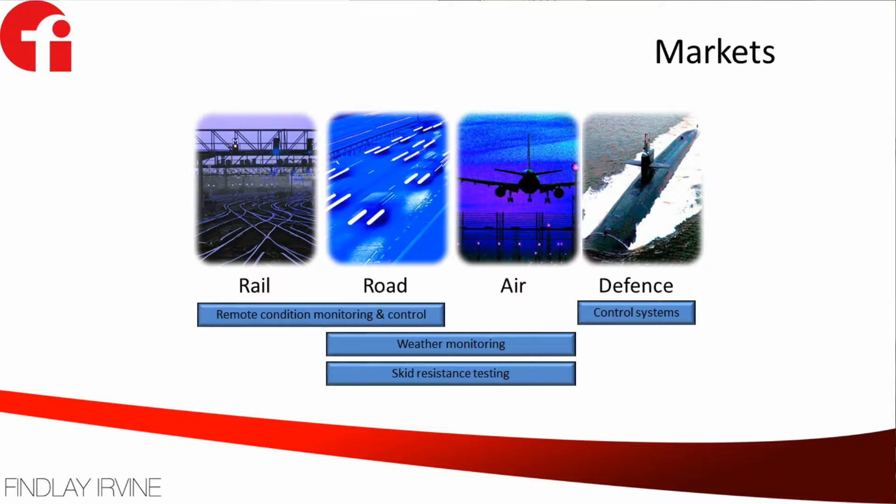Our main areas of markets are defence, air, road and rail. Some of them overlap, so weather monitoring applies to both road and air. Skid resistance testing applies to both road and air. And the bulk of our business nowadays is on the railway, which is Network Rail in the UK. The trains are actually owned by separate companies, but Network Rail are responsible for maintaining and running the track, the signalling and the stations.

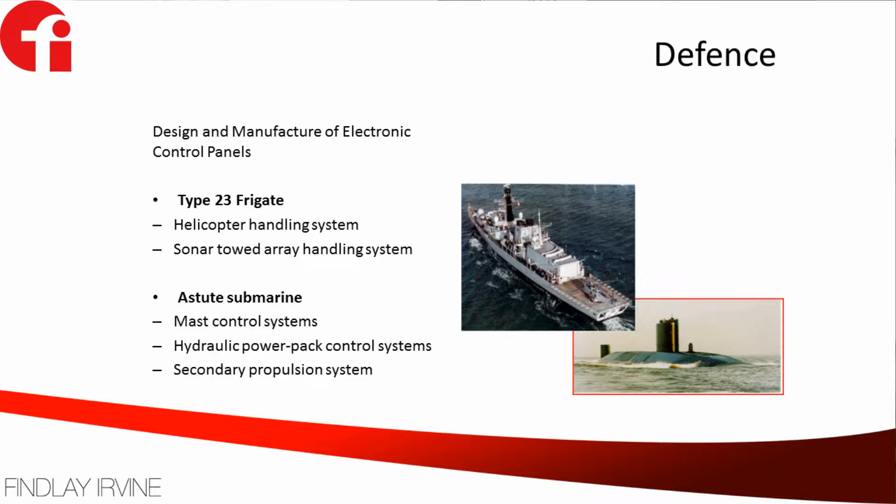So the defence market we have is very limited. We supply a few control systems for the Astute-class submarines and a few things for the Type 23 frigates, including a helicopter handling system. The best way of describing that is playing radio-controlled cars with a couple of £1 million helicopter. It's quite fun.

We do a number of things called grip testers. These work on spinning a wheel at a different ratio to the drive wheel, so it forces it to try and skid. You put a known amount of water in between the tyre and the surface, and from that you can measure the friction of the road surface.

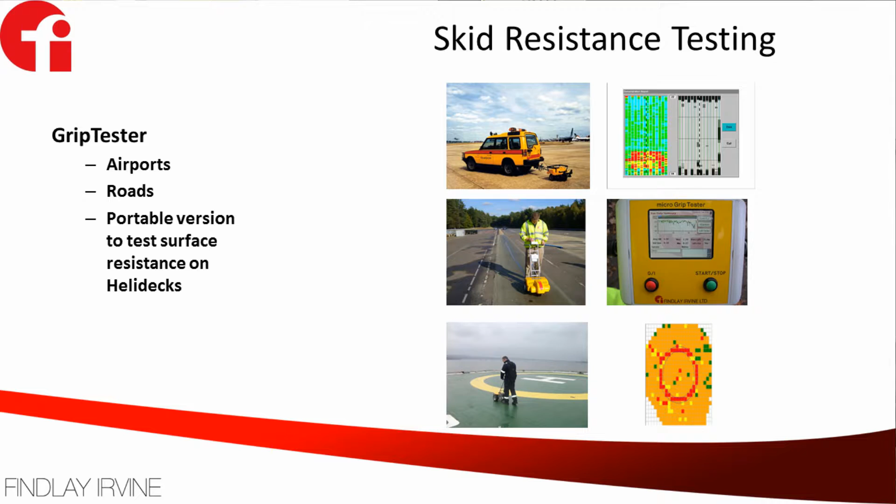All runways are required to be tested in relation to the number of flights they handle, so Heathrow has to sample it every couple of days, whereas somewhere like Jersey may only sample it once every 6 months. We also do a portable version to take out to helidecks on oil rigs, shown in the bottom picture. The results of that come up as a little graph showing whether the friction is good or bad.

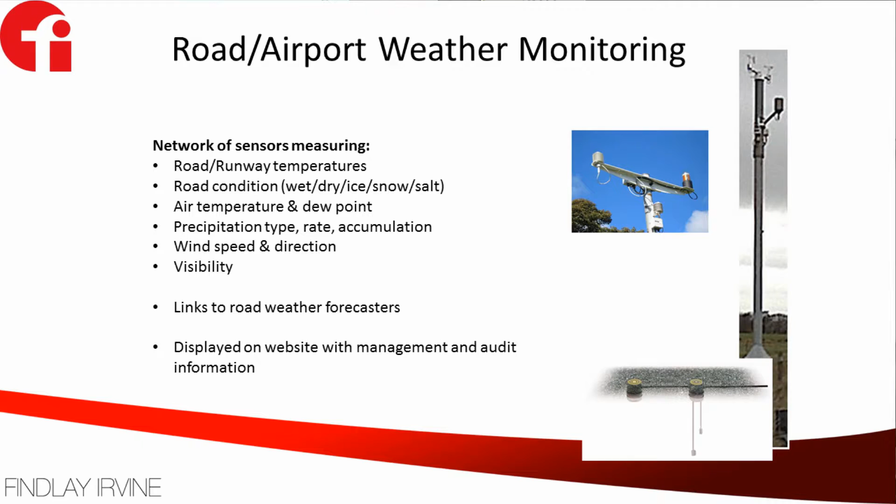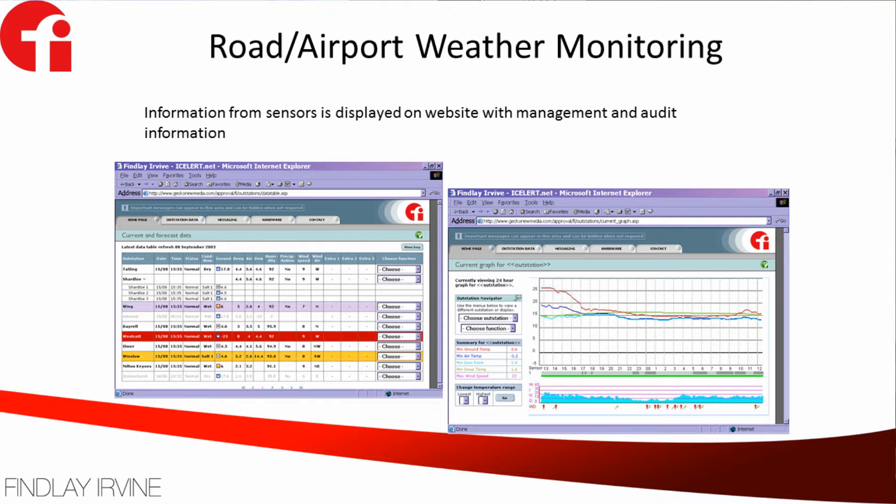A lot of the weather stations you see dotted along the motorways in the UK are provided by one of two companies - one of them is us. So we do air temperature, humidity, rainfall. We have road sensors which can work out the amount of chemical on the road surface. That's used by local councils and highways authorities to work out whether they need to send out gritters and clear the ice. That's provided in the form of a website called IceAlert, which all the local authorities and highways agencies have a login to. We also get information from the meteorological office which feeds into the calculations displayed on the graphs.

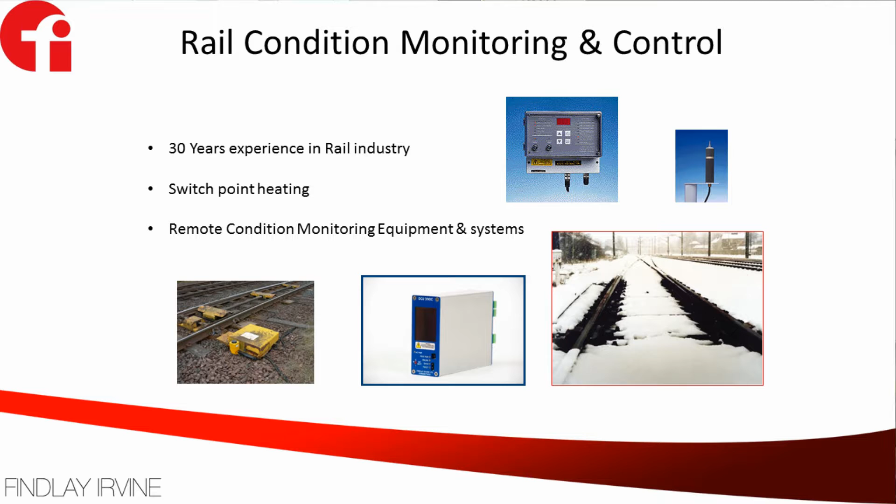The bulk of our stuff, as I said, was railway stuff. One of the things we've been doing for about 30 years is points heating and controlling. So we provide heaters which are mounted underneath the track to heat the points to stop them freezing together. The little unit in the middle is a monitoring unit which detects the temperature coming back from one of the various sensors, so it knows the temperature of the rail and the temperature of the surrounding area.

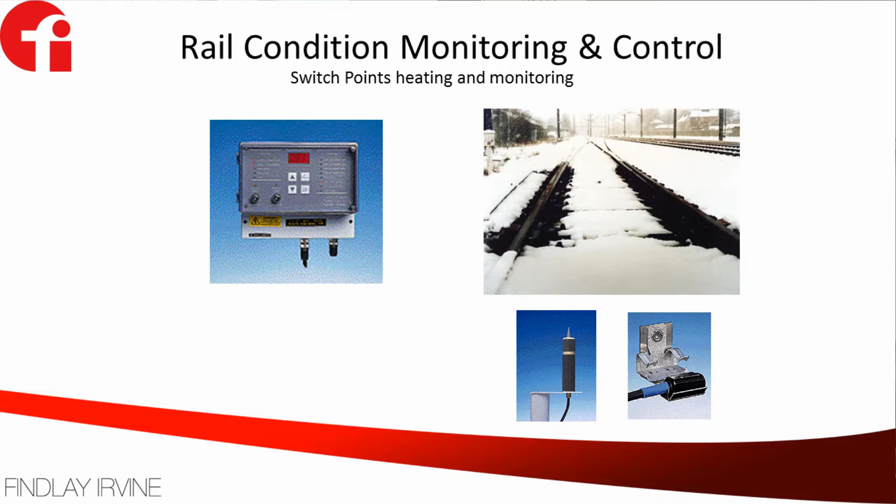Another thing we do is monitoring of the current going into point motor controllers, so they can detect whether they're seized. Those are done using current transducers.

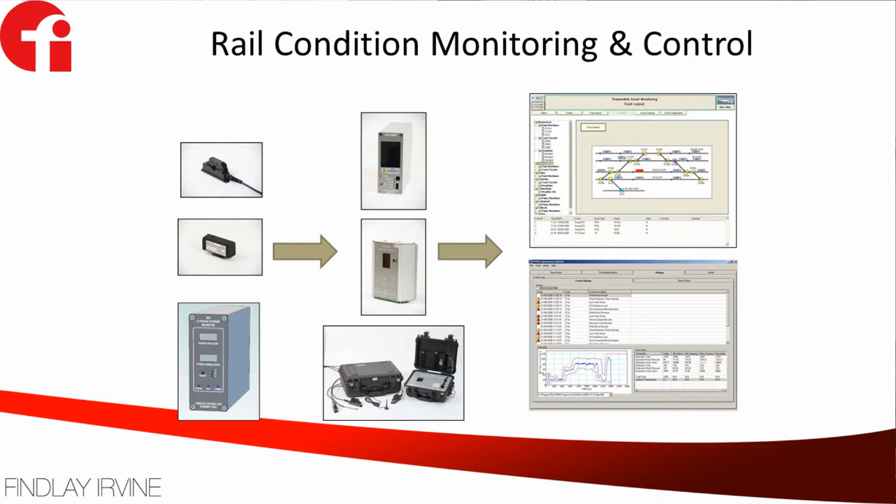We also have a range of temperature modules, which is the picture on the left-hand middle. So a little block of resin which has a temperature monitor clipped onto the track, and that sends a 433 megahertz wireless signal back to a receiver, which tells you the temperature of the rail at that point.

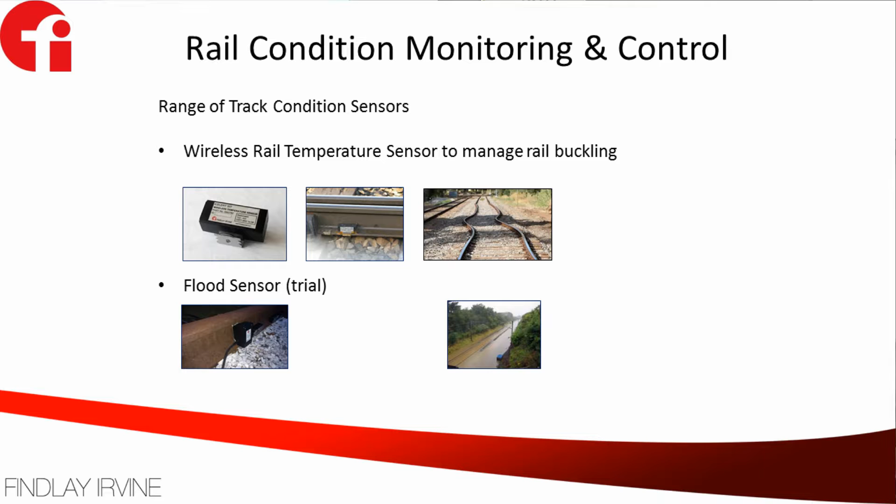Part of the reason for doing that is to detect conditions where the rails may start to buckle. We're also now trialling a system for detecting flooding on the railway line, so we can give them advance warning of where there's areas which are dangerous for a train to go into.

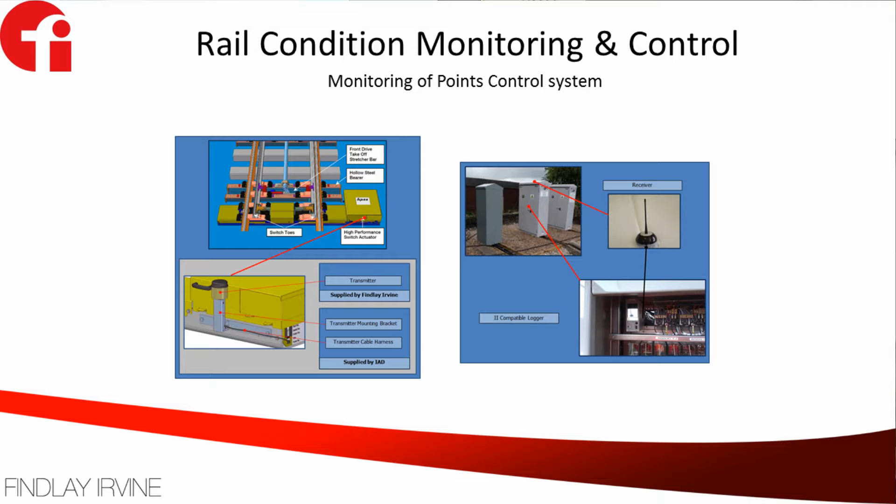In 2014, right at the end of the year, Network Rail came to us and a couple of other companies and said, we have a problem. So we had an issue. They wanted to monitor these point motors which are used on high-speed rail lines, because obviously you don't want a train derailing when it's doing 125 miles an hour.

The units had a data output which is normally used for maintenance. They wanted to actually use that to monitor it in real time. So we came up with a little unit which you can see on the left hand side there with a black dome aerial on it, and that connects to the data port, and sends wirelessly back to the control station the status of the various parts of the point motor.

So it tells whether the points have properly engaged, when they've been moved, the temperatures, the current being used by the motor. So from that they can determine whether part of it is failing and needs to be maintained, or whether it's actually failed completely and it's going to cause a problem.

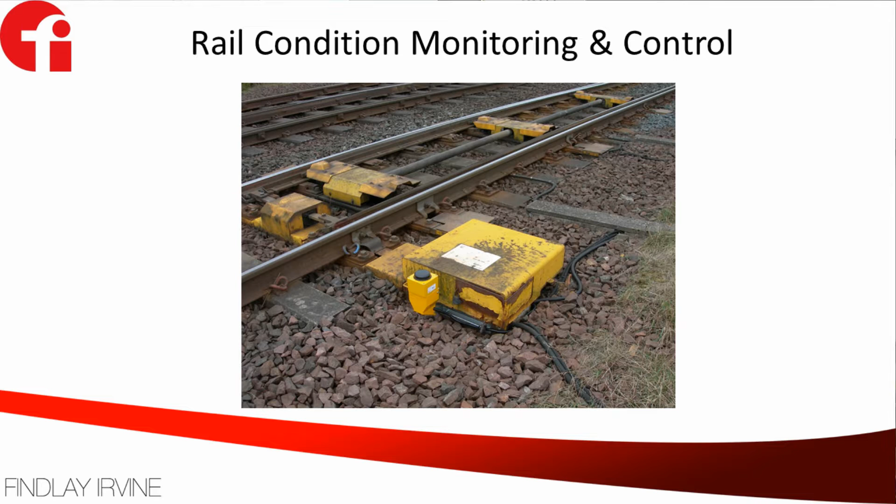Originally we looked at using the IQRF module for that. Unfortunately, as you can see, it's very close to the ground, and propagation of RF under those circumstances meant that with the blue modules, the DCTR52s, at the time they didn't have the range to get 600 metres down the track with that propagation, so unfortunately we had to go with Zigbee instead. But those are now being installed and so far have been working very well.

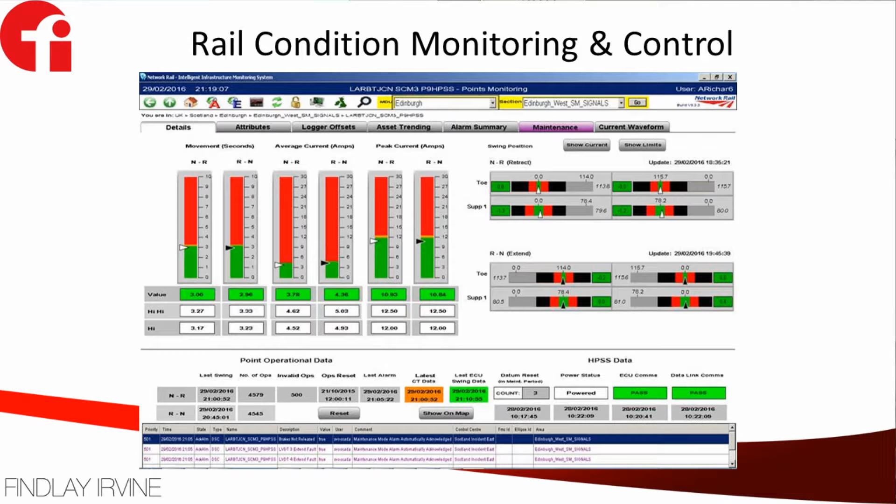And that is a graph showing how it comes up on their monitoring system. But in December 2014, Network Rail said we have another problem which we need to find an answer to, which is that.

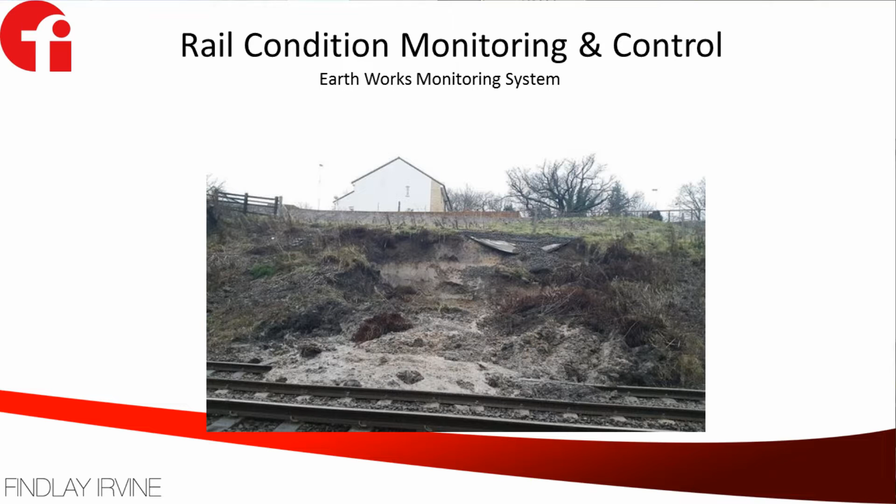When we have landslides in the UK, they tend to be fairly catastrophic and very quick. And if a train hits that, derailing a train is going to be very nasty and very costly, potentially in human lives and certainly in compensation costs.

And the Office of Rail Regulation said to the Network Rail people, you need to come up with a way of trying to work out when that's likely to happen and where it's going to happen.

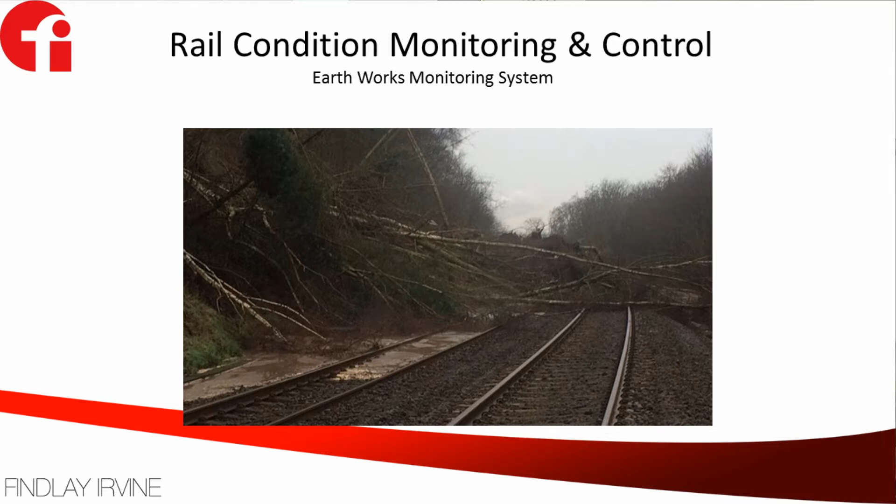And it's not just coming things onto the line, it's the line actually disappearing. Some of you may have seen on the south coast of the UK last year, I think it was Dawlish, the underbed of the rail was completely washed away, leaving the lines hanging in midair. No way a train was going to be able to go over that.

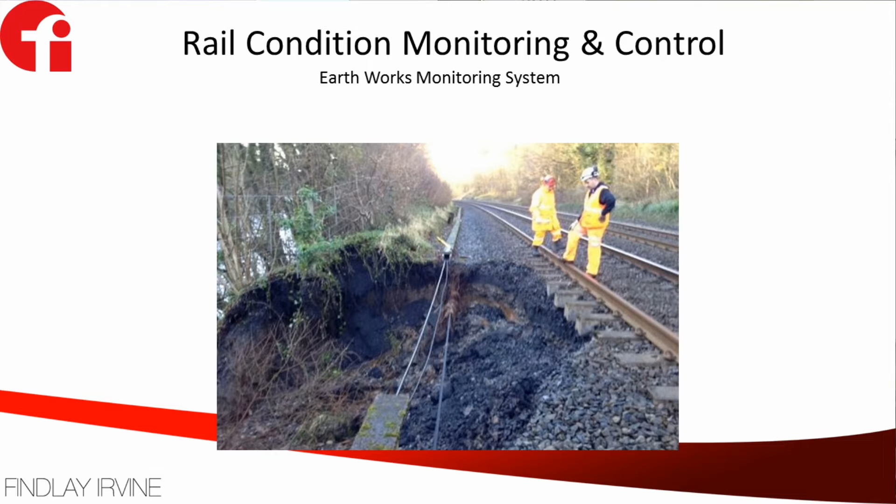So they asked us if we could come up with a solution which would do two things. One, give them a warning that a landslide had happened, and secondly, try to help predict when it might happen, which obviously is two different kettles of fish.

So that was the schematic of our proposed solution. It's a pole. We couldn't have any power because they may be in the middle of anywhere, so the system has to be totally self-powered. So the suggestion we came up with was a range of sensors on poles.

The idea being if the landslide moves, the poles will move. Each sensor has an accelerometer in it, so it knows the XYZ value from gravity. That reports back to the control box, which is solar powered.

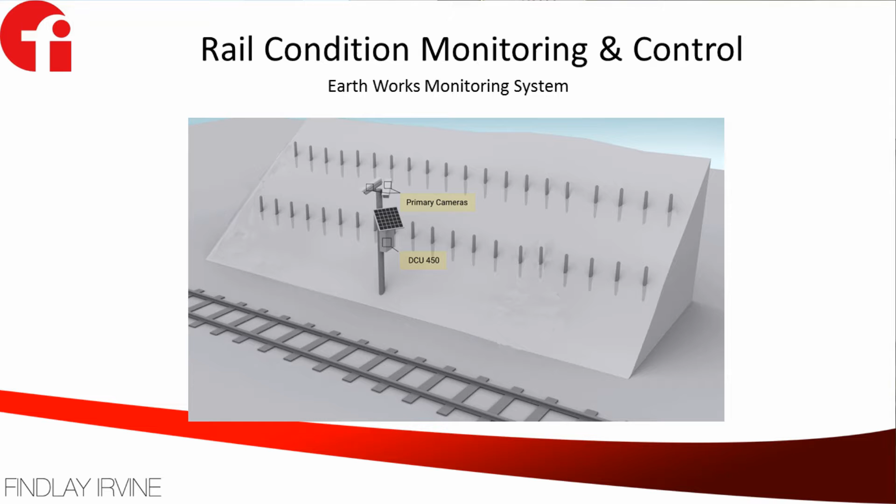The box also has a pair of cameras connected to it which look up and down the track, so that if a landslip is notionally reported, it will then send a picture from the site so they can have a look and see if there's actually a blockage on the track, or whether it's something they can just clear up because it's only gone down the side of the embankment but hasn't actually blocked the track.

So this is what the sensor ended up looking like after about a year of design. I was very fortunate that Vladimir came over in February last year, made quite a few suggestions as to how we could achieve this with the mesh system rather than using the system we had designed in-house. He also invited me to Jicin to come to the training course, which was very useful.

The accelerometer measures in 3 axes, and it has to be battery powered for 5 years and sealed to IP68. So that was the original design.

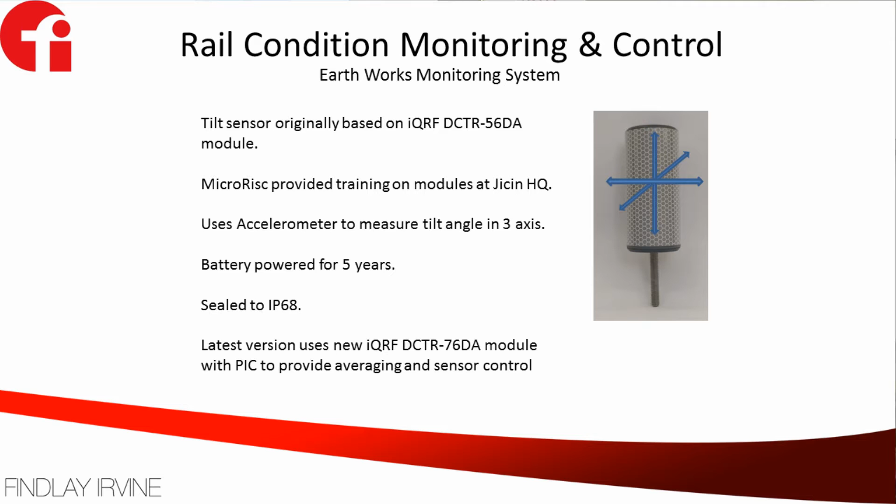The first ones we installed, we found to our cost that we hadn't realised the accelerometers, as well as measuring gravity downwards, would react to the movement sideways, and we found that the carbon fibre poles supplied by Network Rail resonate at 22 Hertz. They move 3 millimetres when a train goes past or when it's very windy.

Which is obviously not desirable, so we had to go back to the drawing board a little bit, and we put a PIC on there now to sample them once a second and average that out. We also changed the accelerometer to have one with filtering on, which solved the problem.

But then that showed another problem, that the temperature coefficient on the accelerometer we chose produced a variation in temperature overnight, which was also unacceptable. So we're now on the third version.

So the current sensor looks like that. Normally has a cap on the top, which is sealed, and the inside is filled with gel to make it completely waterproof. The reflective material is so that at night time the infrared cameras reflect the IR lamp off it, so you can actually see the sensor at night. And that's what the sensor currently looks like.

The battery, the IQRF module, the accelerometer and a PIC. It has a magnetic reed switch at the bottom to enable us to control it, turn it on and off, and put it into RF program mode for updating.

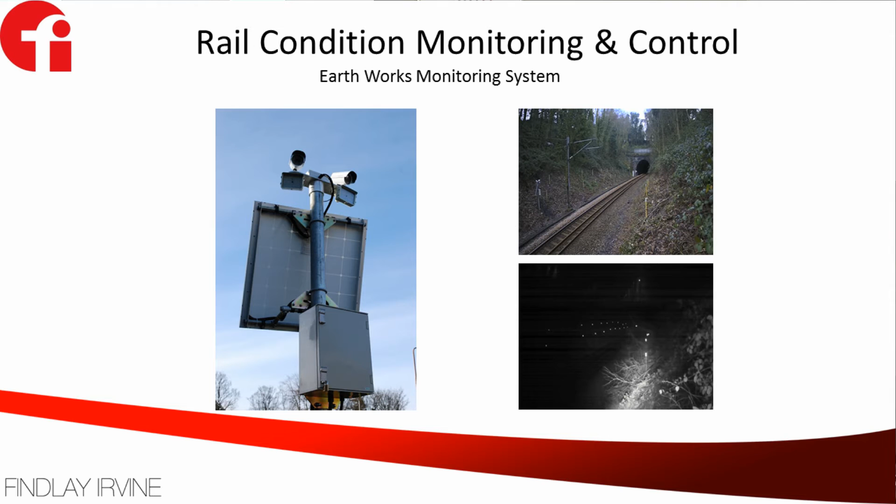The control box looks like that with the cameras, and there on the top right you can see some of the sensors installed on the poles along the side of the track.

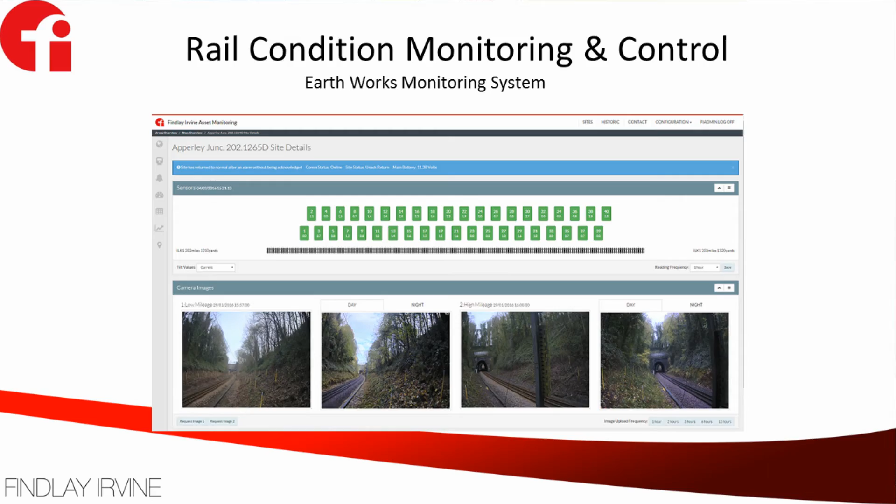And that's a view of the website, which displays all the information. The green means the sensor is in a stable condition, hasn't moved out of tolerance. If it moves more than 5 degrees, it generates an alarm, and that will then send an SMS and an email to whoever's on duty within about 2 minutes of the tilt sensor moving, and that gives them an opportunity to stop trains and have a look and see what's happening.

I'll give you a very quick demo of the sensor. I haven't got the box with me because they wouldn't let me bring that big box on the plane, so I'll just demonstrate by plugging in to test it.

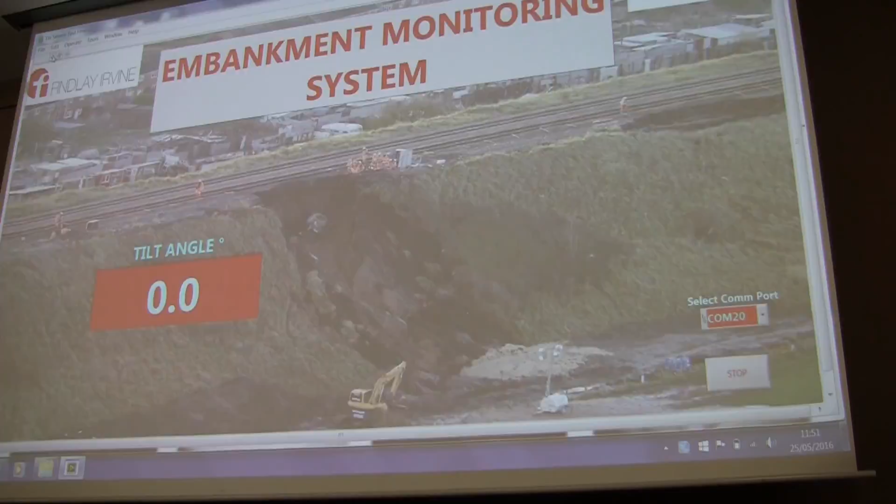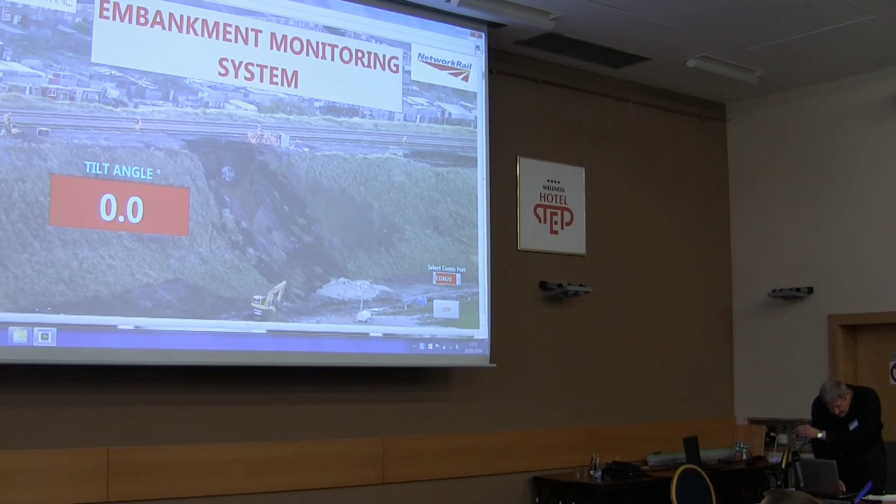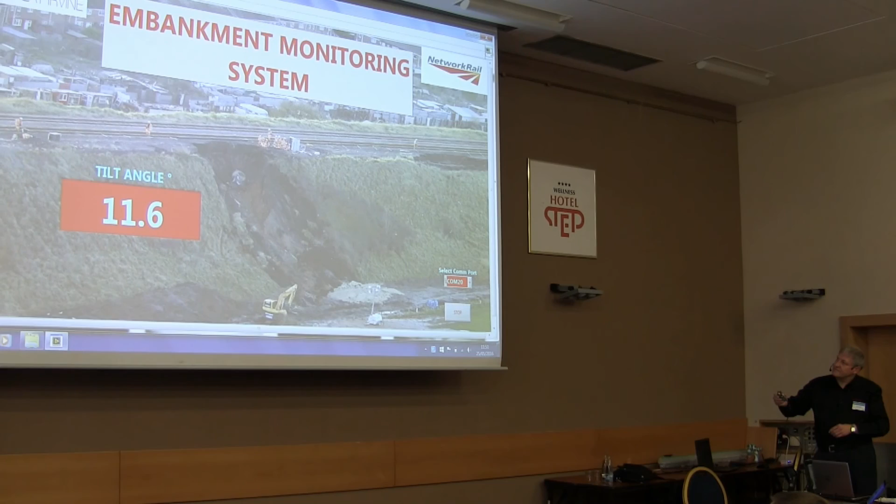So you see as I move the sensor around, the angle of tilt changes. That would be reported every minute back to the control point, and that's averaged over a period of time.

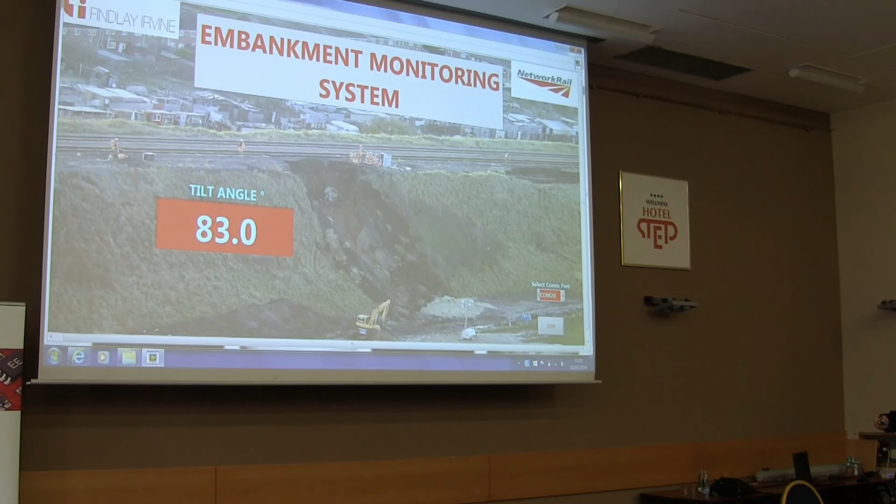It uploads from the control box to the website every 2 hours, but if there's an alarm detected, it uploads immediately via GPRS, and also then proceeds to upload the pictures. If anybody wants a demonstration of the live website later, I'll be happy to show you. Thank you very much.